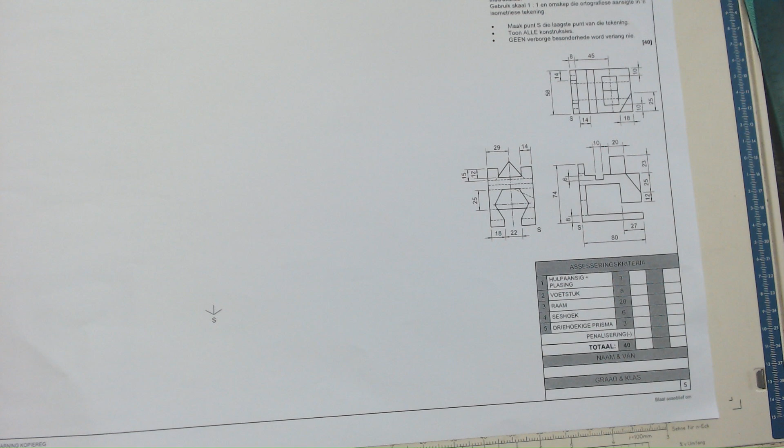Okay, now that we have more or less an idea where I need to go and what I need to do, now I can actually start. First step, I'm just going to move this paper up because it's very low on the board and I do not like that. There we go, that's much better.

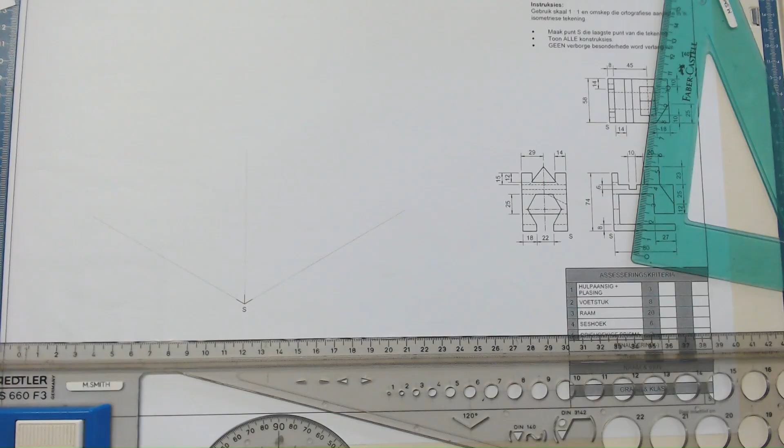Scale 1 to 1. Okay, so top, left, front. All right, so left is going to be on this side, front here.

First things first, I'm going to draw my block, and it's nice to have a method to use in isometrics, right? So you must really understand your process and be comfortable drawing it.

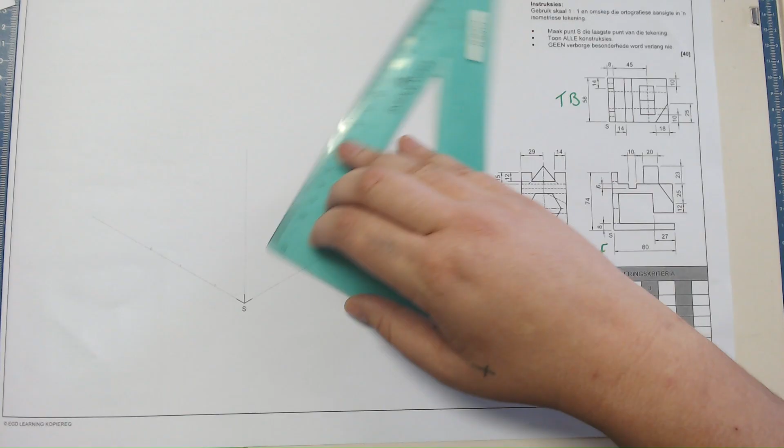All right, if I have my block, then I know I can't go out. If I go out of it, it means one of my measurements is off. It's just a way to double check myself.

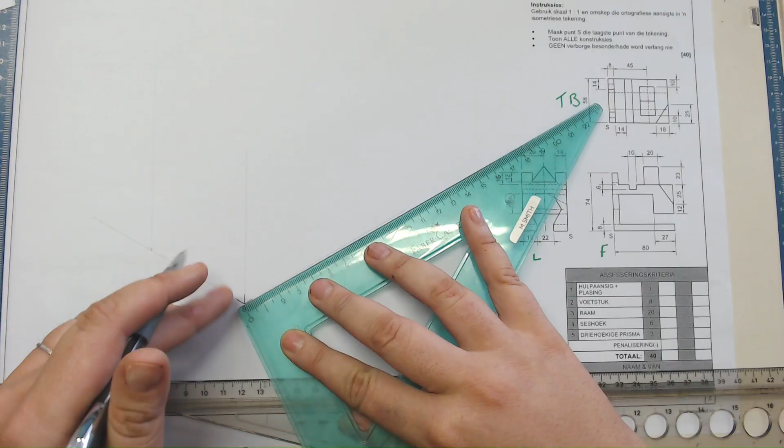Okay, and up, and then how high? 74, 74, but remember that does not include my prism, so I need to make sure that when I do my prism, it won't fit in there, and that's okay, but that's the thing I'm going to do last, because it is a bit complicated. Well, it's not, it takes the most time for me.

Okay, and again, it's my process. If you have a different process, and you want to do the other things first, it's fine, as long as you do it with intent, like you plan and you have a strategy.

Okay, I'm just drawing my block at the back as well, because then I know more or less where I need to go in. Okay, there we go, barely touching. It's okay. All right, so now, because there is a hexagon, I need

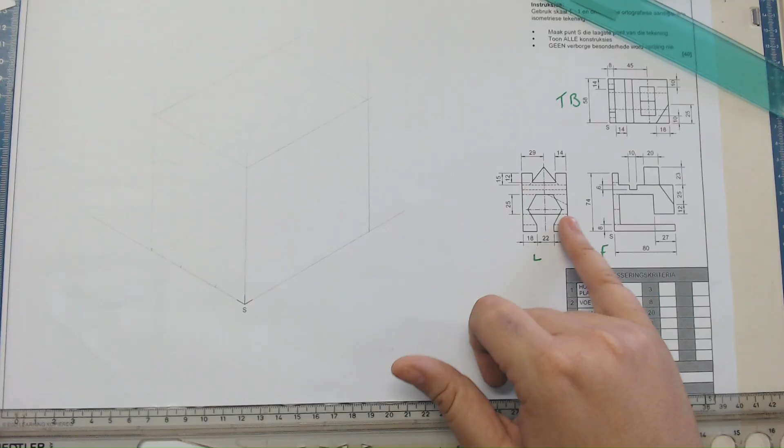to draw an auxiliary view, and if I don't do that, then the whole thing's going to be wonky. Remember, the rule is, if you have lines that are non-isometric, meaning it's skew or slanted, even the prism, you can draw an auxiliary view if you need to.

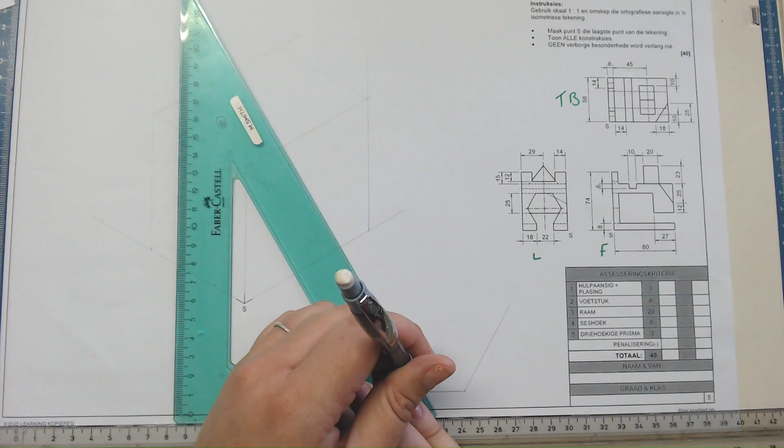So, what I'm going to do is I'm going to draw a hexagon. Remember, use the 60-30 set square. And you just draw. And remember, your auxiliary should be clear, guys. It shouldn't be the lightest construction lines that I have to squint to look at, because I do look at it. It says you must show all construction lines, or constructions.

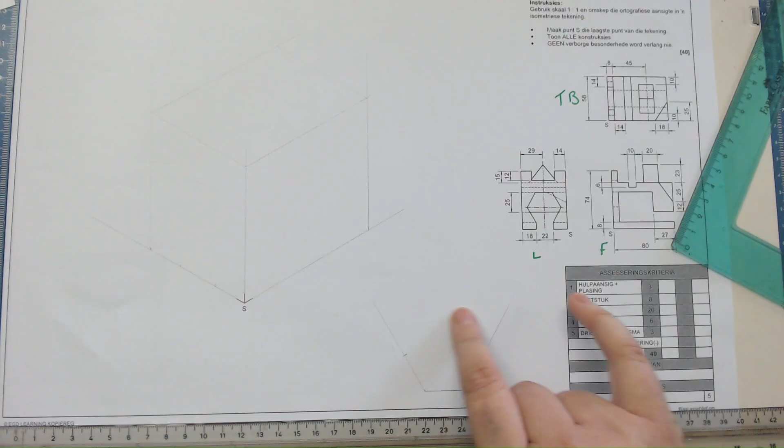All right, now that includes your auxiliary, by the way. Now, if you look at the mark allocation, it was 22, right? Yeah, if you look at the mark allocation, they say that's your auxiliary view and your placing. All right, so you get 3 marks for auxiliary and where it's placed, and where your whole drawing is placed.

Then the bottom part counts 8 marks. Your frame, the whole thing in general, is 20 marks. Your hexagon that you're going to draw, 6 marks, and your prism at the top counts 3 marks. All right, so these are marks you don't want to lose, and they're easy marks to get, so just don't be lazy, don't cut corners, because we look at the corners and we want those corners. All right.

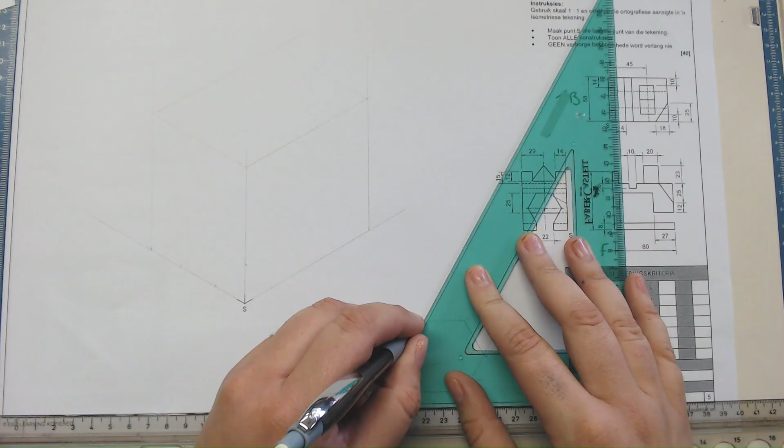Okay, all right, this looks weird. Let me double check everything. That's 22. Yep, 22. Okay, it's just my brain, I guess. Yeah, it's my brain. Okay, I'm just going to draw a block around it.

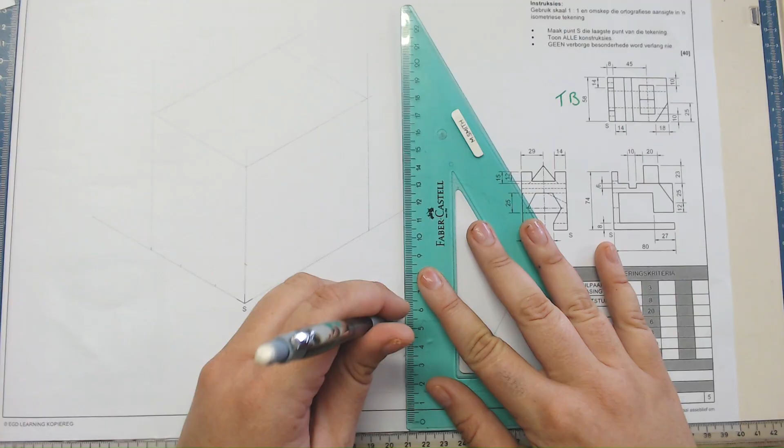Okay, and there, I hope you can see it. All right, but it doesn't need to be... well, it does need to be perfect, but the point is it doesn't need to be exactly perfect.

Okay, so that is more or less over here. Okay, now I'm just going to number my blocks. So that's 1, 2, 3, 4, 5, 6, 7, 8, 9, 10.

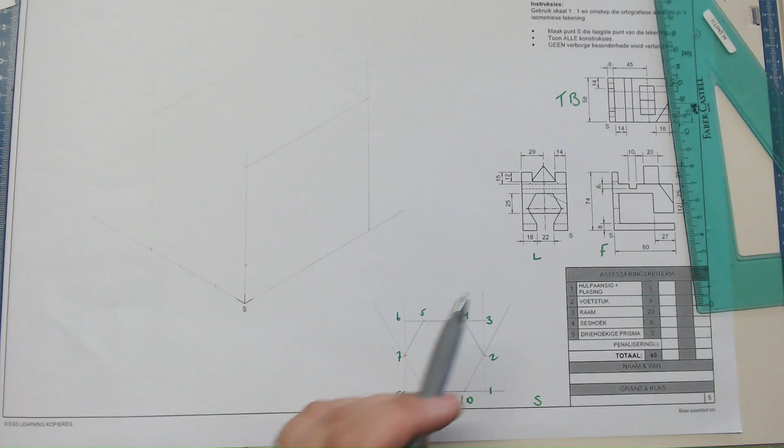Okay, so I'm doing it in pen so you can see it clearly. Now, the thing is, this hexagon is not exactly on the floor, so I can't just start here at the bottom. It needs to go up, so 8 millimeters up. All right, I'm measuring 8 millimeters up.

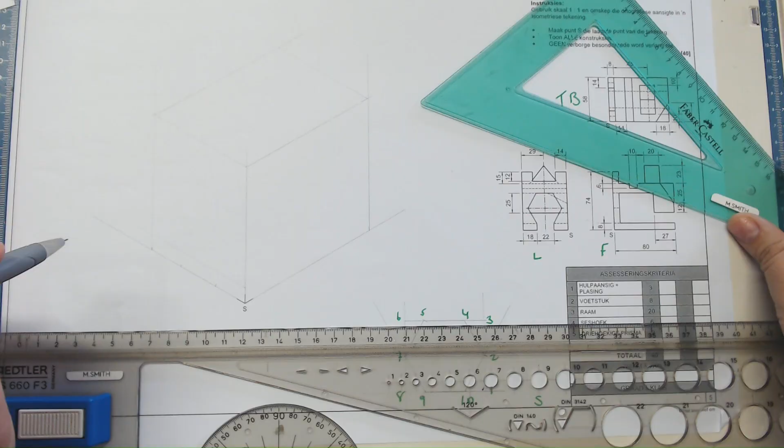Why does this look skew? Is that my brain? It's just my brain, I guess. Yeah, it's all like that today. Anyway, okay, so I'm going to just take this measurement of 22 up, and then I'm going to start there.

There we go. All right, now I'm going to draw my block. Okay, measurements and distances, I have 10 and 9. Ek het 10 en 9, so 10 is daar, 9 is daar. All right, I have 10 and 9.

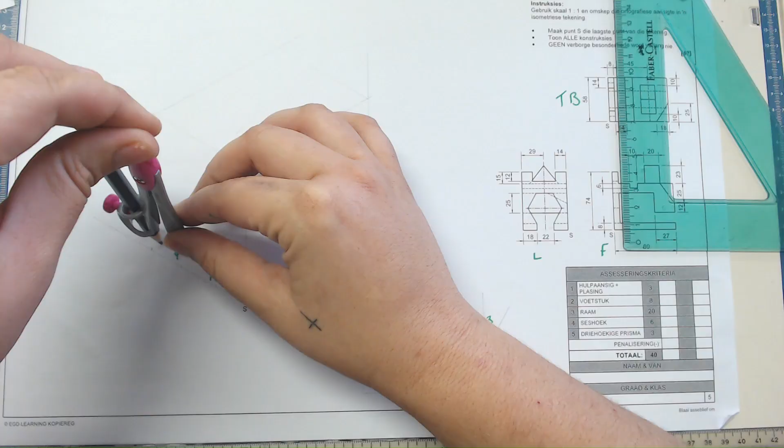So all I want to do is get my distance from 10 to 1. All right, 10 to 1 is there, and 9 to 8 is going to be the same. Okay, so I just make a little mark. Now there's the edges of my block.

Goed, nou onthou jy kan nie skewe lyne meet by jou hulpaansig en dan probeer implementeer hier nie. You can't. You need to have a block with isometric lines in order to draw the non-isometric lines.

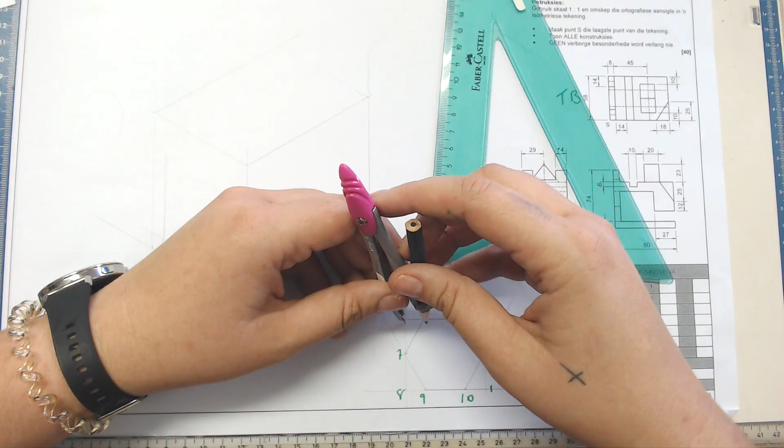Compass, I'm going to just put it between 6 and 8 just to get that measurement a bit bigger. There we go. All right.

Okay, now I know how big it needs to be. And then, I forgot my 7 and 2. Sharp point on the corner of 8, pencil at 7. 8, 7, 10. There we go, there we go.

And all I need to do now is project these marks up. Construction lines, so you can't probably see it on the camera, but it's there to help me. And then I'm just going to finish my block at the top.

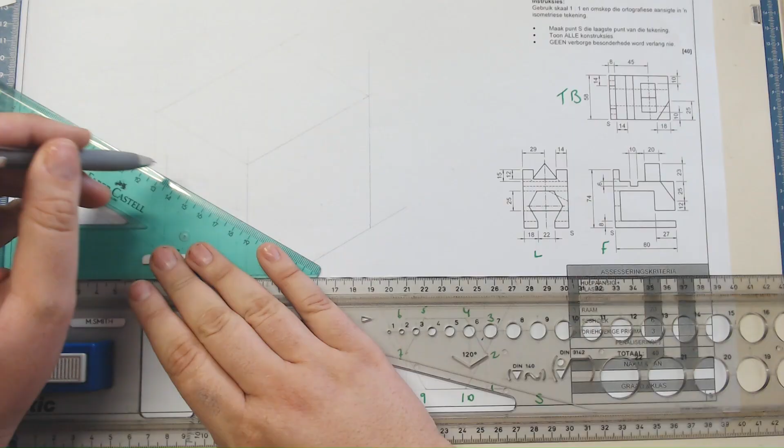Okay, now I know that is going to be the top part of my drawing. En ek connect letterlik net die lyn op mekaar.

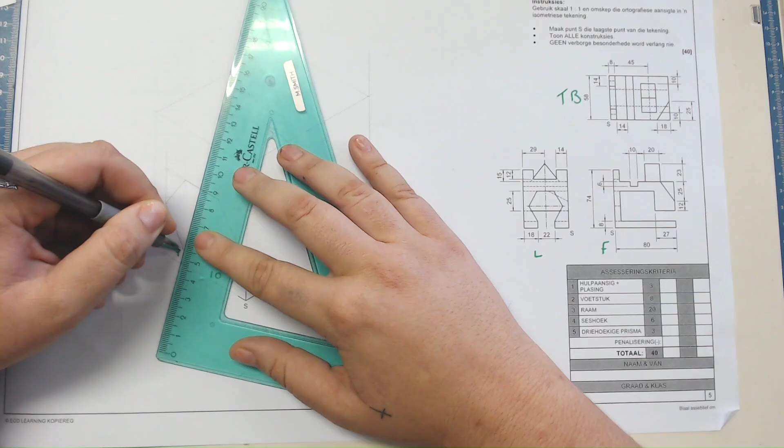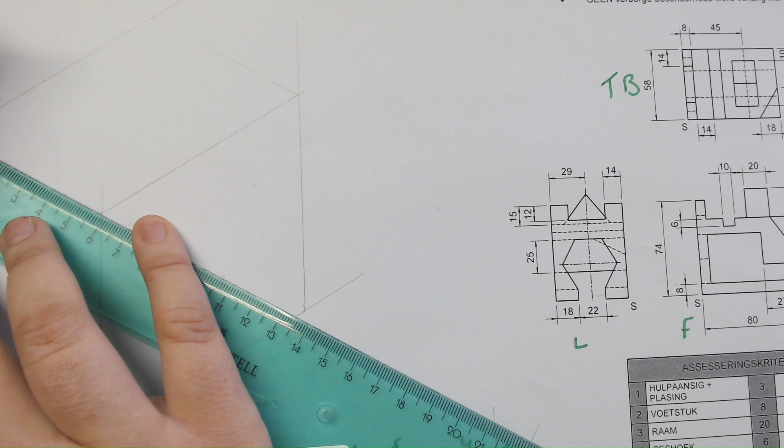It's so difficult to be accurate with a camera in your face. Ek lê onder die kamera en probeer nou maar net van hierdie angle af te draw. Okay, there we go, 14. And the width is 8. How do I know? Because if I project it all the way up, there's 8.

Okay, goed. So dis hoekom jy met al jou afmetings kyk en al 3 jou perspeksies, projections. This is 8.

I'm just going to make this lighter. Make this dark.

Okay, and then I need to go down. How much down? All right, so the inside is 12 down. Okay, so 12 af. Jy moet mooi kyk na watse deel van die tekening wys my aanwysings of my afmetings. Vet lank, daar het 'n bietjie oor gegaan, maar dis okay.

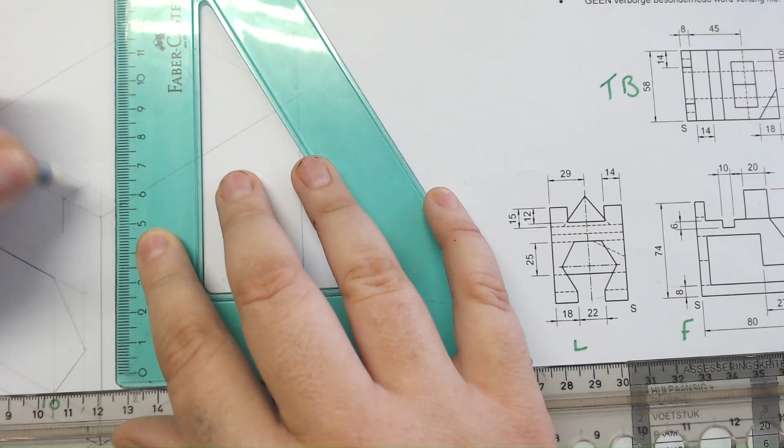Ons werk daarmee. Okay, so that's 12, so I'm just going to project this to the side. All right, there we go.

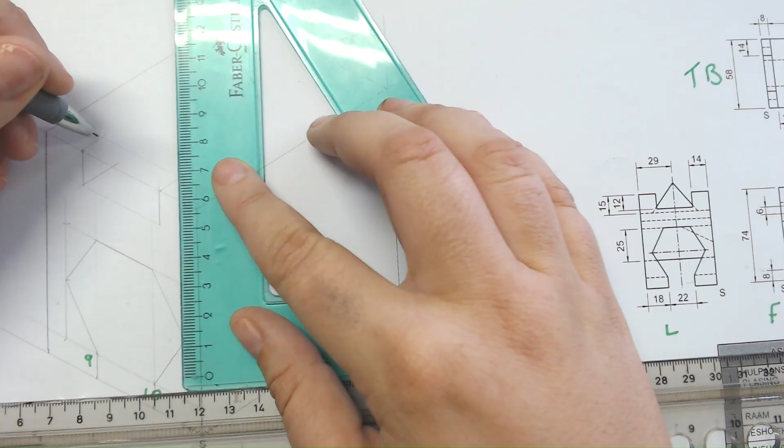Goed, en dan kan ek hierdie, remember, 3-dimensional, you can see corners, so jy moet jou hoek ook insit, nee? Okay, so dit, there we go. Goed, ek gaan hierdie donkerder maak.

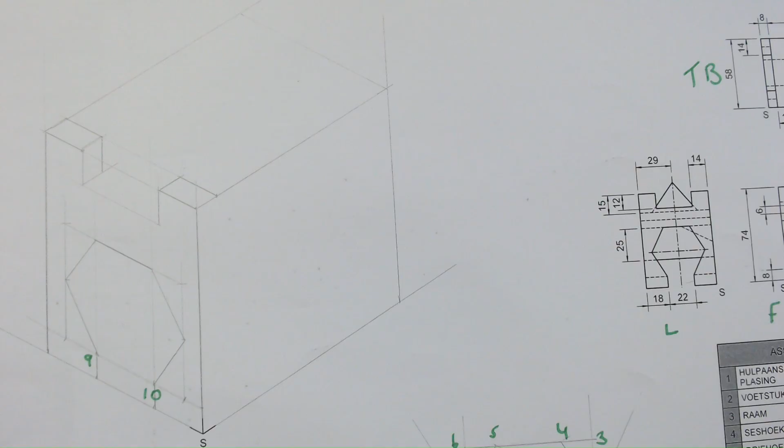Finally I'll work out the marking points. Can you see? Alright guys, so it's starting to get a personality, right? It took quite a bit of time, but you just trust the process, okay?

So now, when I look at my drawing, this continues all the way to there. Then it goes 6 millimeters down, 10, 6, and then whatever. To know the distance of this one, I look at the top view, it says 14, then 8, then 14, then 10, then whatever is there. Okay, so I have my measurements.

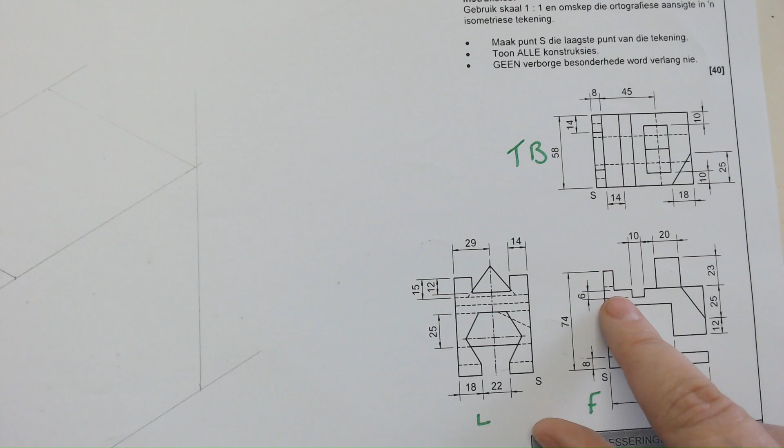All I need to do now is measure them. And then, let me show you something.

If you look at this, that 15 - that 15 is those lines. It's how high it must be from the top. So I'm going to measure 15 down from here. It's going to be a little bit lower than the other side, which it should be. The other side is 12. Alright, 15 down, and then I measure 14 to the side.

One of the things I've noticed is if one of your measurements is off, you guys just continue with your drawing and then everything is going to be off. Oops, I'm sorry, that was off camera.

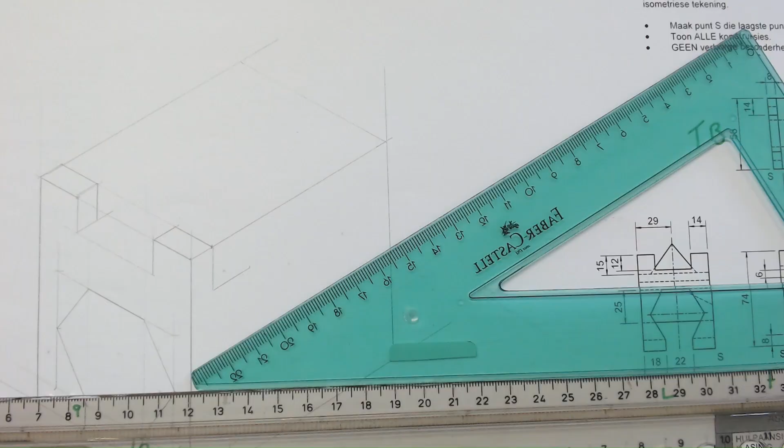So all I did was literally measure 15, and then I measured 14 to the side. I measured 15 down and 14 to the side. But as I was saying, a lot of the times I see you guys have one wrong measurement and then you continue with your measurement all the way around. Don't just do that. Double check your measurements, okay?

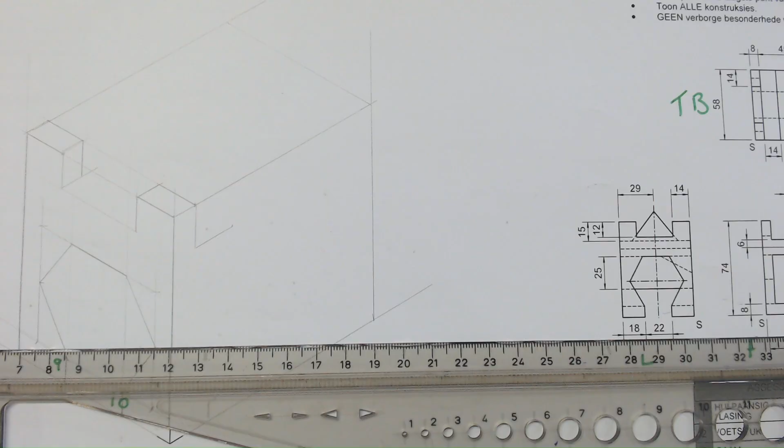For example, if I want to double check everything, I look at this measurement and it's going to be the same as the other side, and then I'll measure things from this side all the way to the inside. Don't just measure from one side to the back. Measure from all the sides. Double check yourself.

So what am I going to do now? I'm actually going to do this back part. It's quite easy - the back part, the bottom part. Ooh, that is so skew and very ugly. I'm very sorry about that. I'll fix it quickly.

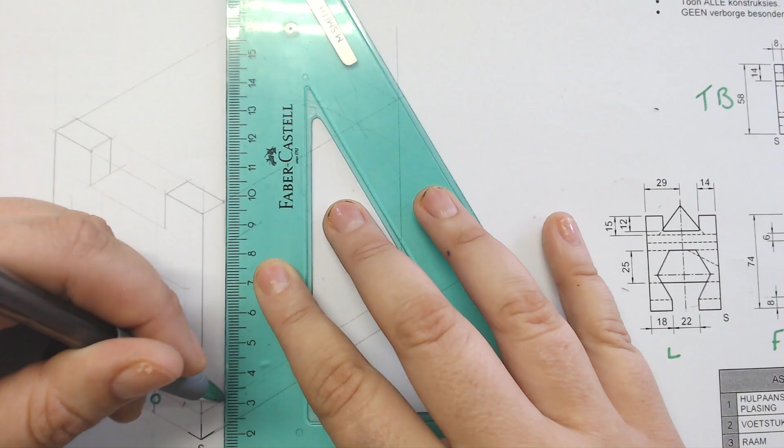Alright, that's better. And then it goes the same measurements here. And it is 8 as well. So I'm just going to make a little line there because that is basically where everything goes. I'm going to erase this corner just lightly, because I need to remember not to continue drawing that line.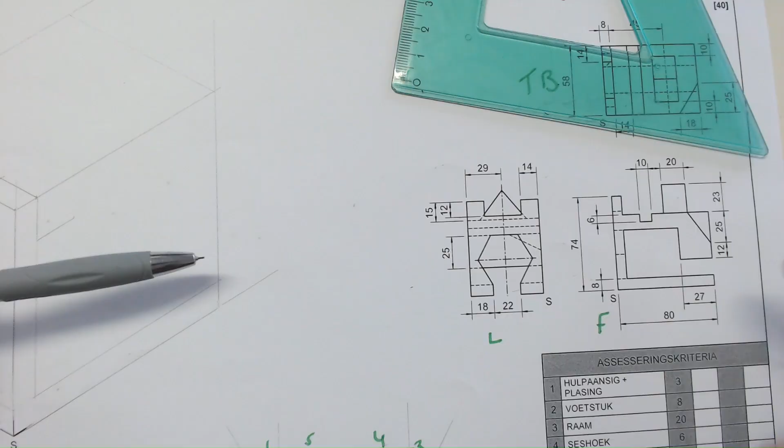So I've drawn this side part now, this side part. So next step, I'm going to get this gap. Now, again, if I use my ruler and check where my projection is, you see this hidden detail line? It's basically that back line. So now I know that this is - and as I look here, the top part of my hexagon is basically the height of the other part.

So all I'm going to do is first project this one to the side. I'm going to take this measurement to the side, and that same height I'm going to take all the way back, because that is the height - that is this part as well. So I've taken that height, projected it and taken it.

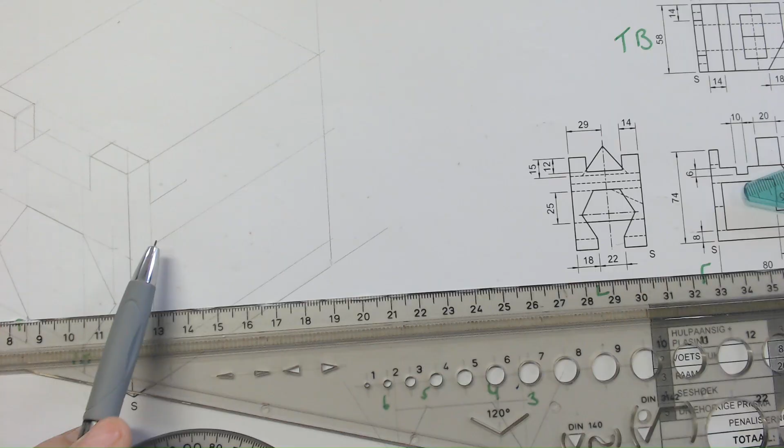Alright, I'm just going to zoom out, because I keep cutting you guys out of my drawing. Okay, so next thing I'm going to do, after I have that height, now I'm going to measure 27mm from this side, just to get that bottom part.

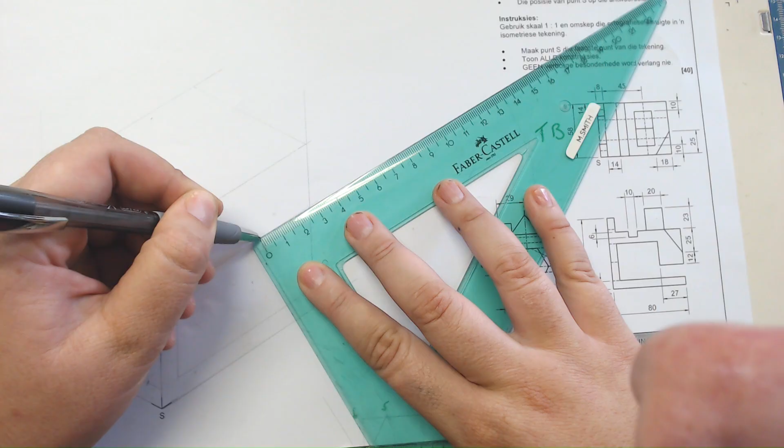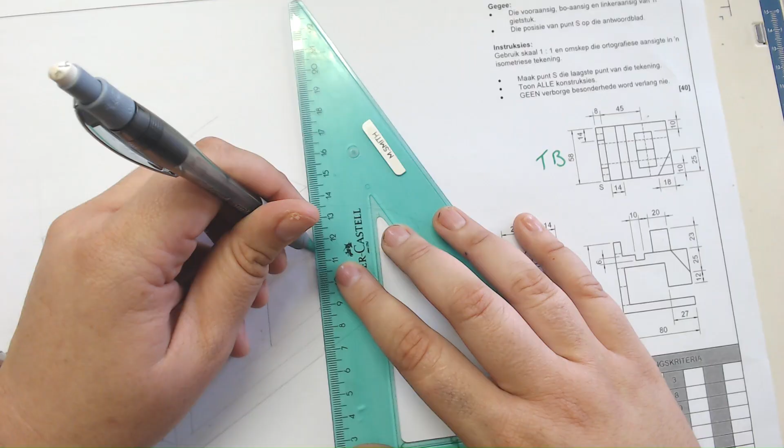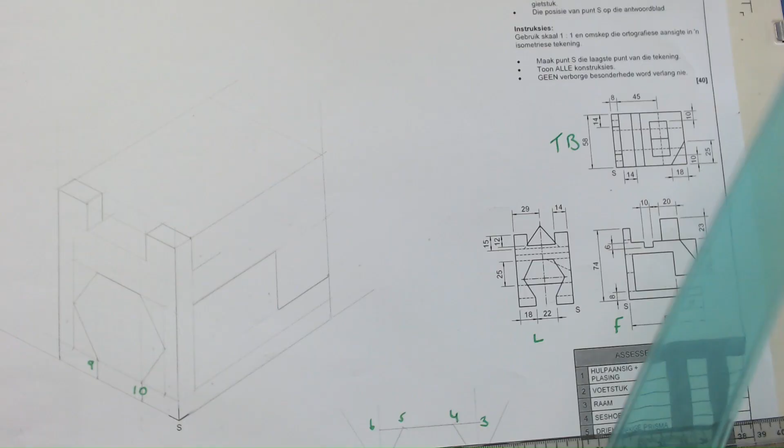Okay, so next - that height is 12 millimeters. So it's 12 millimeters up. So I take it from there.

12, that's right, good. And then that corner is 18 millimeters in. Okay, wait, before I do this - I'm going to take this line through because even though I'm not going to use it, it's kind of necessary to know where the placing is.

Okay, so now I'm going to measure 12 up, right, and then 18 from here. So 18, 18, and 12 up.

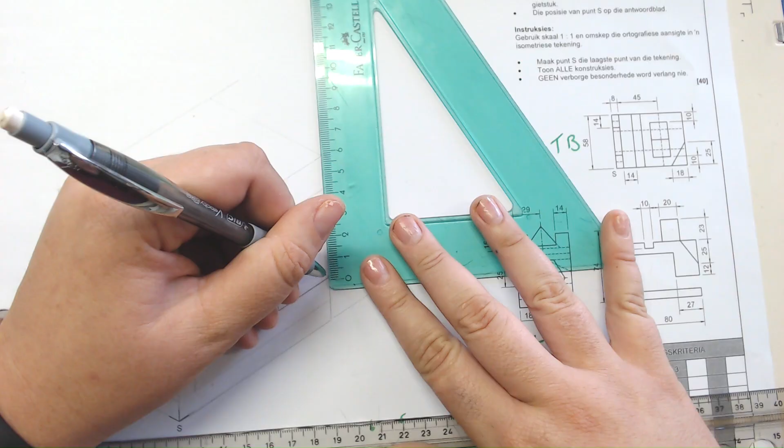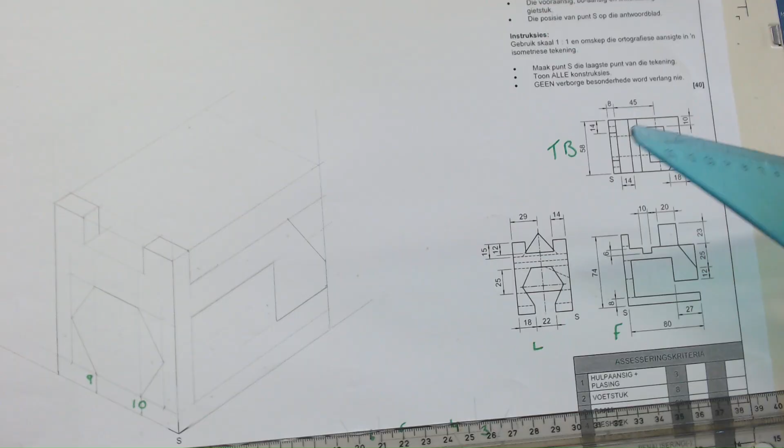Guys, you really can't just look at videos and think, okay, now I've figured it out. You need to practice it, you need to get your head around it and understand how you need to think, otherwise it's not going to work. The more you do it, the fewer mistakes you'll make and the faster you'll be able to draw it.

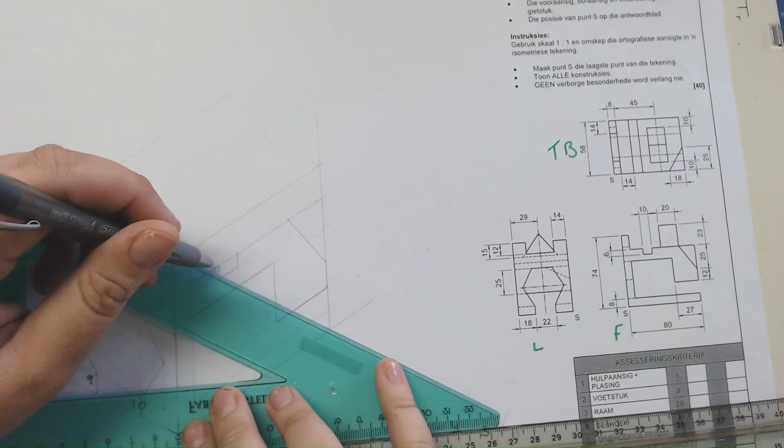I'm just taking this to the side because some of these corners will be seen, so I'm just drawing the lines lightly. Okay, next, I'm going to finish this corner quickly.

It's 25 from this corner. First thing I'm going to do is act as if it's not cut off, so I have that angle, and then I can measure 25. So I'm going to make a little mark, and then I'm just going to cut it.

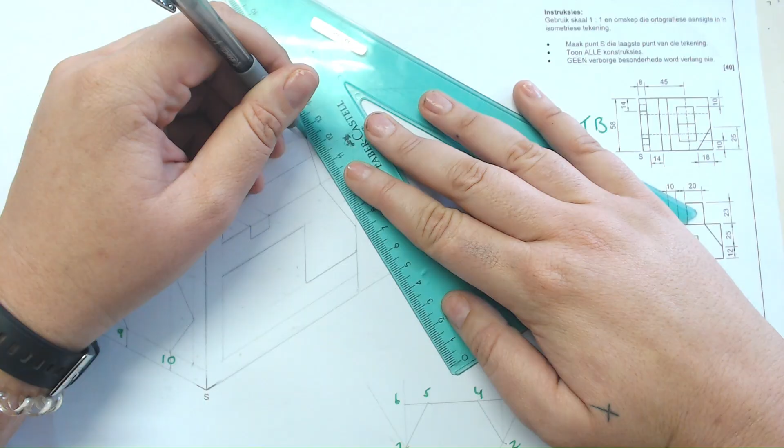The thing is, you can still see a little bit of that corner that's been cut, so that's why I'm making it a little bit of a wonky triangle. Just to explain, this corner is basically that area you see there. It's not empty, it has a bit of an angle and you can still see it.

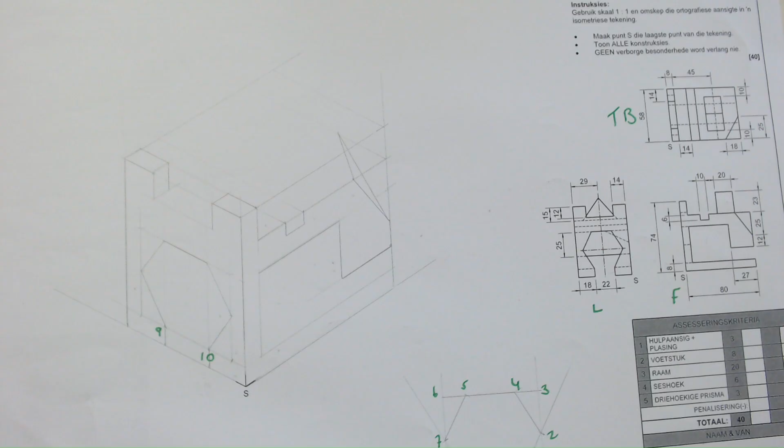Now I'm going to darken this line for myself. There we go, and then it's very skew. Guys, I'm making a mess, but in my defense, it's really difficult to draw with a camera on my face.

Now that I have the majority of these things, I'm going to take this measurement, make a little mark there, and then project it to the side. It's a lot of work, but you'll see why, taking this to the side here.

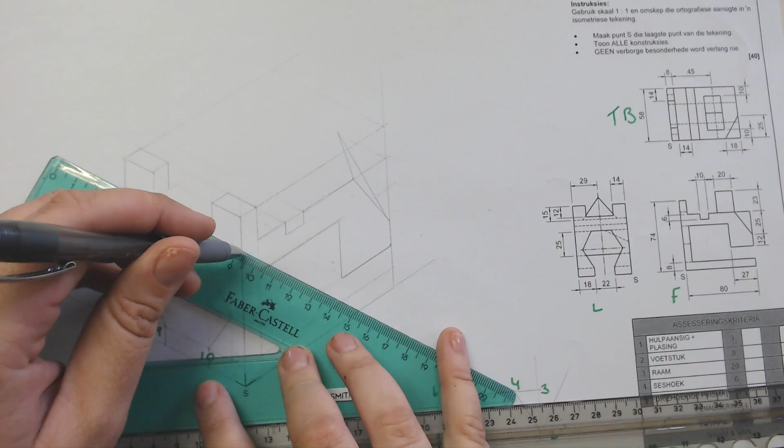Now that I have that, I'm going to make a little line there. I did all of this just so I knew how high and where I need to stop with this line. Then I'm going to project the corners here and take it to the side, and extend it, just this.

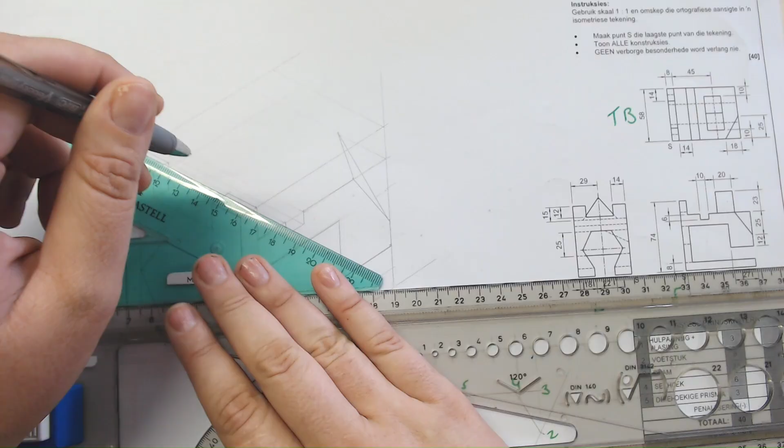Okay, and it goes down, then you can't see it. And then this one goes down as well, like that. And then it goes to the side.

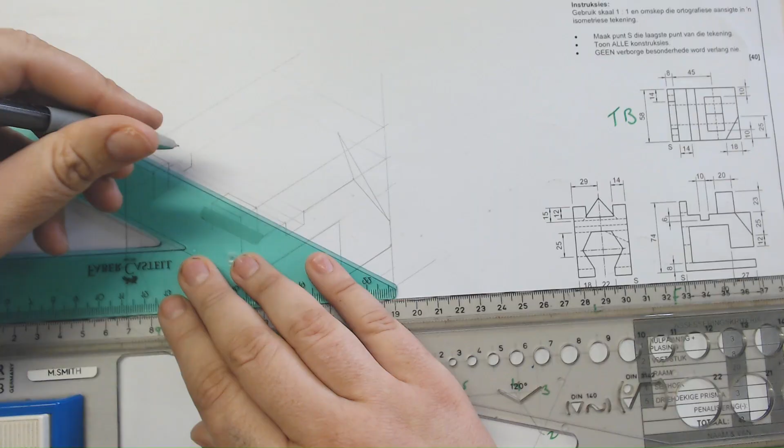Let's just fix this. I did something stupid now. I don't need to draw that. All I need to do is extend this. Oh, I'm making a mess.

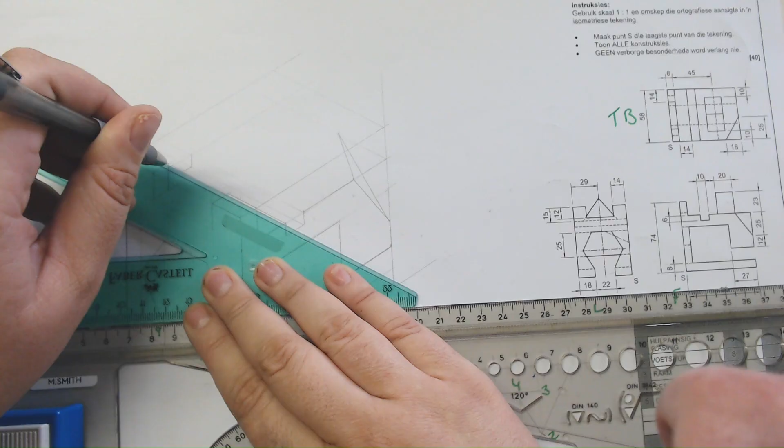Okay, so what I'm going to do is this corner, I can now make darker. See, this is why you need to concentrate, because if you don't, you have problems.

That's the ugliest looking line I've ever drawn, but it's fine. Okay, now we are almost done, guys, very, very almost. This line here that I have is basically what I'm going to build my prism on.

Now the prism is 20 millimeters wide, and it starts in line with this one. So what I'm going to do is make a little line in this corner, because now I know more or less where my prism is going to be, on that line.

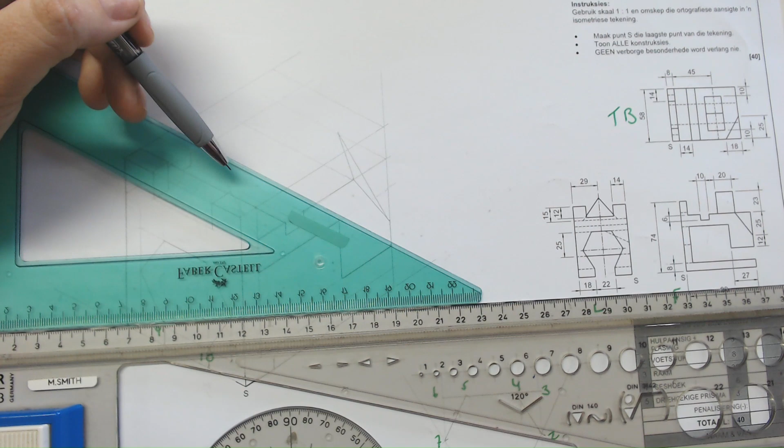Then it's going to be centered in the middle of my drawing. Okay, so it's going to be 58, minus 10 on the left and minus 10 on the right, so it's 38. I'm going to measure 10 millimeters, 10 millimeters, then I know how deep it needs to go.

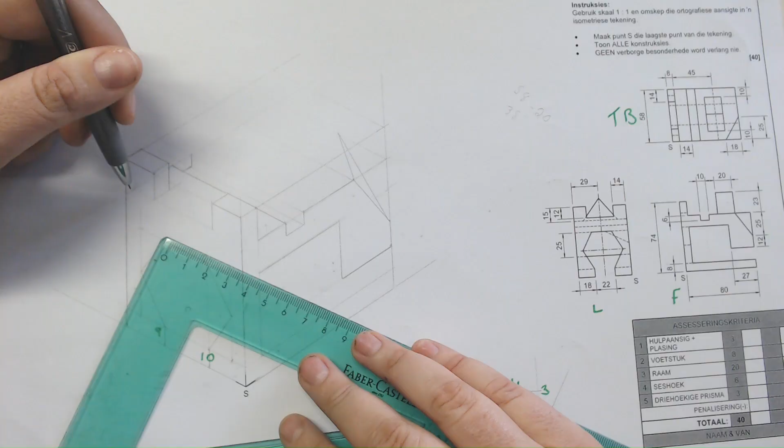Let's just turn this around, otherwise I'm going to break my brain. Okay, this one is there, yes. So 10 and 10, that's where it needs to be.

And how wide is it? 20 millimeters. So using this angle, I'm just going to measure 20. There, alright, once I have that, I can move on to the next part, which is actually, we're almost drawing it.

Let's quickly just get the outline. Alright, and basically here, that's my block that I'm going to work inside of. Did I measure wrong now? No.

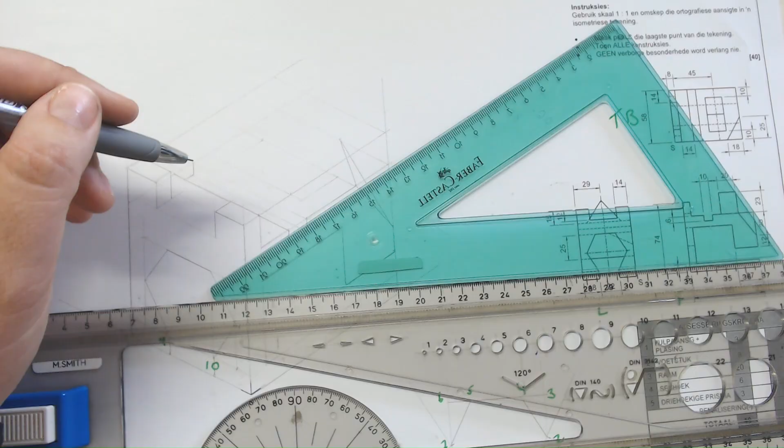Okay, my prism is going to be in the middle of this. I want to double check quickly, so the center line should be 29. Okay, there's my center, I'm projecting it to the back.

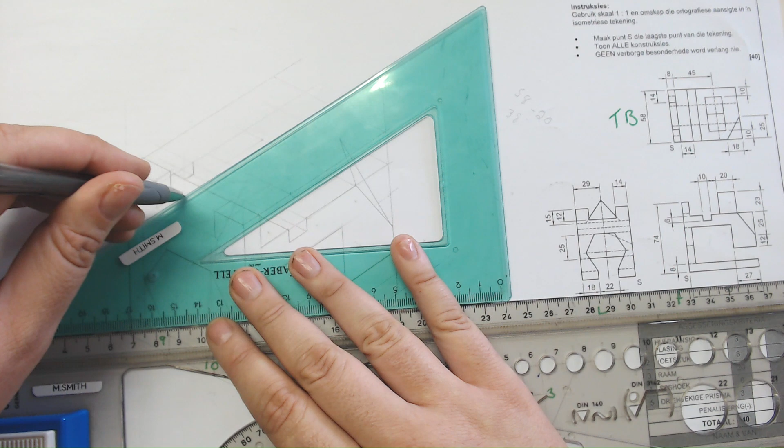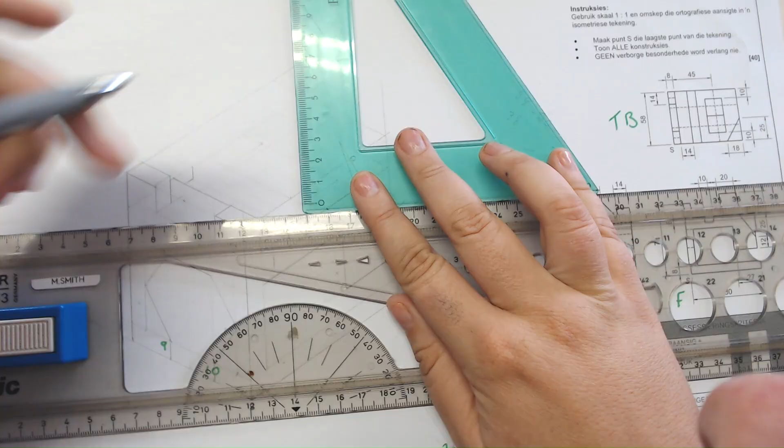Okay, so basically this is my center line, and now I just need to actually draw this prism. So, 23 up. And it's the wrong one again. Yeah guys, my brain doesn't want to work. Oh, it's the right one. Yay, okay, I'm just going to make a little block.

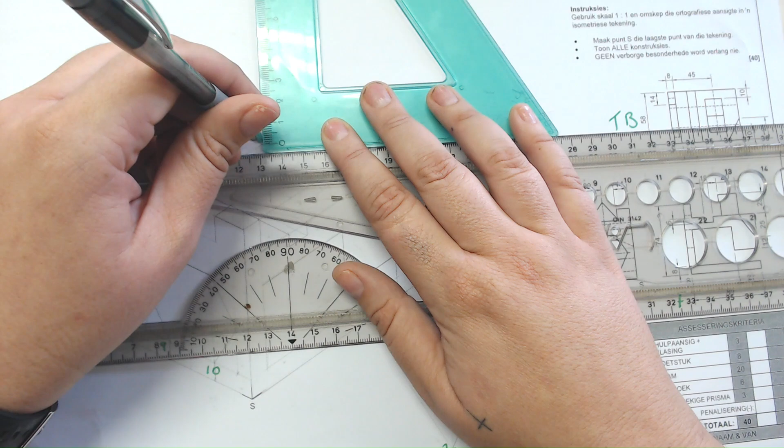Now, the thing is, it doesn't help if you draw a bunch of lines and blocks and stuff, but you can't remember what you did. So you'll see there's a lot of lines here, but I know more or less which one is which. Sometimes I make mistakes, a couple of mistakes, and it's only because I get confused with all my lines. So yes, you should not erase them, but also just be careful not to have too many.

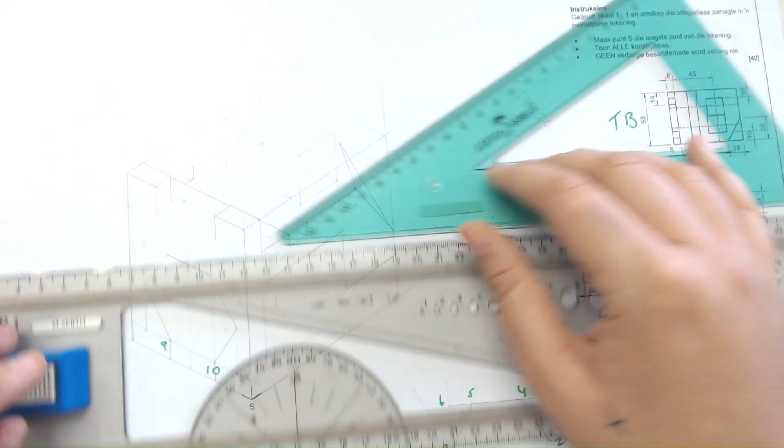Okay, so this is basically the block that I'm drawing, and here, and this one, and this one. And there's my center line. So here to there is where my prism is going to go.

And yes, it looks funky.

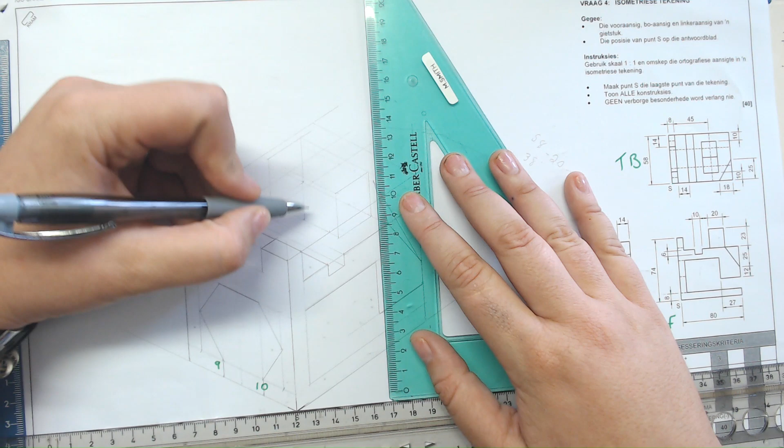Now I'm just connecting the dots. Okay, so I'm darkening it.

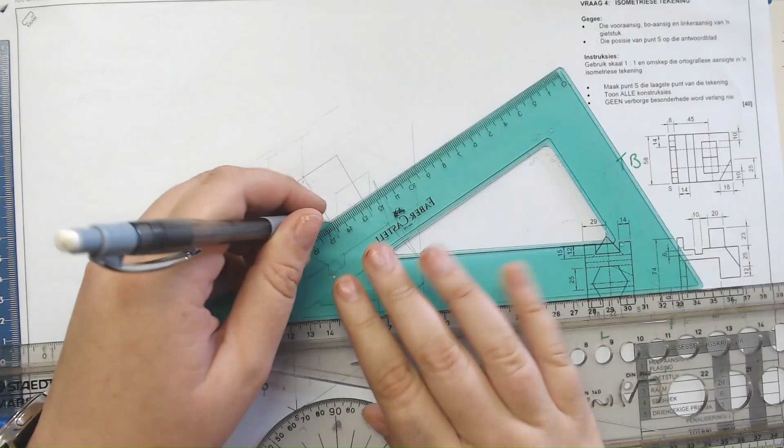I'm just darkening all my lines that I left unfinished. So I'm literally just going to follow the lines now.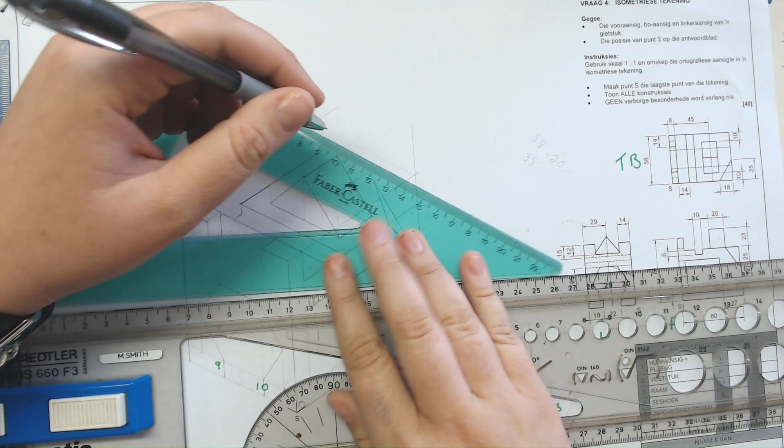There we go, just a bit of erasing. Okay, alright guys, almost done. Just darkening my final lines.

Okay, then, almost forgot this. This is actually a stupid way to lose marks. Okay, then I'm going to take my prism. This is going to catch us out.

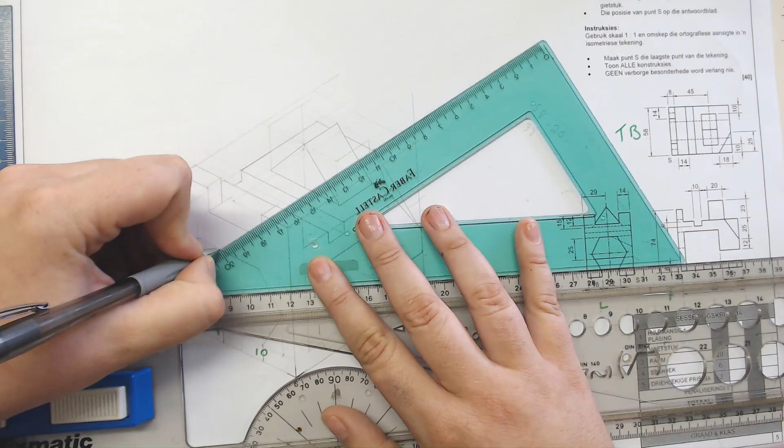Okay, so the prism is actually only that distance, right? So it's 8 millimeters. At the back here, all I'm doing is measuring 8 millimeters on every corner. 8. 8 from that corner as well. There we go. And then 8 on this corner. And 8.

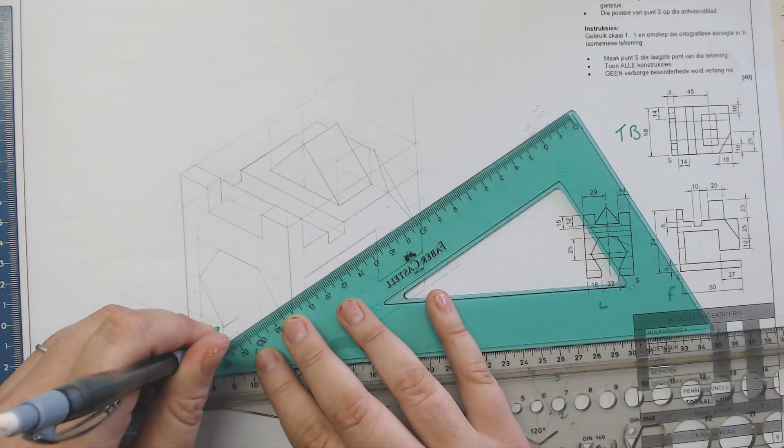I'm taking it all back. Okay, and I'm taking it up because behind it is hollow. So from this one, I'm going to take it and just end it there.

Okay, and the same is here, but I can't see it, so it's hidden, and I don't need to add hidden details. So now, here it comes.

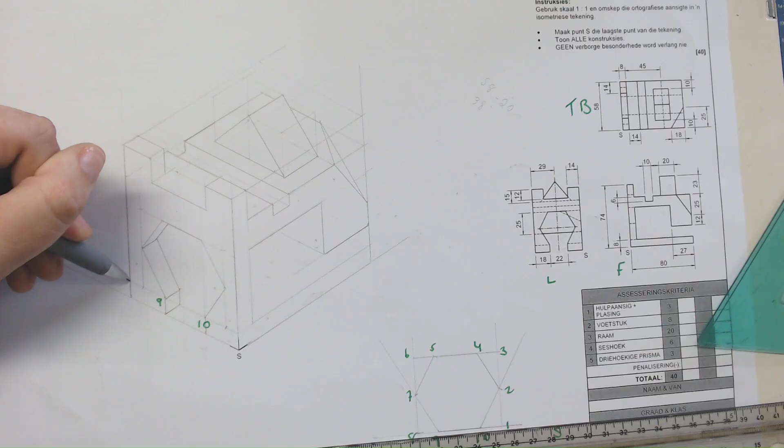I'm going to take this line, this corner, project it back.

If my pencil wants to work. Like that. Okay, and this to the back and this to the back.

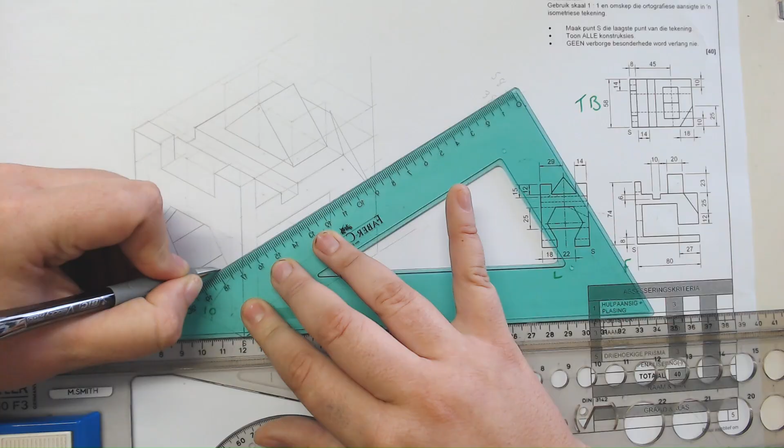Alright? Because this part is basically the flat part that's still remaining, so this one also needs to go to the back. Just that, as I put down, take this one.

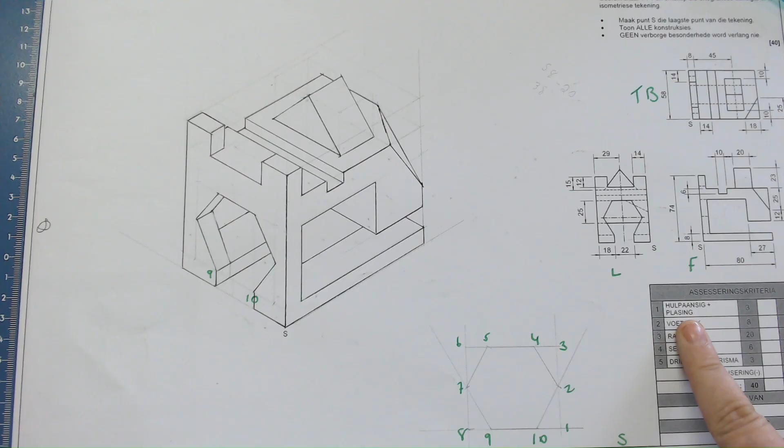So you get a mark for where you start, and you get 2 marks for your auxiliary view. That is a total of 3 full marks. And with EGD, you don't often get full marks like this, so you need to make sure that you add that.

Then the foot placement and the voetstuk. It's a combination of half marks and full marks. You get a half mark here and here for this part and this part. So that's 2 marks in total.

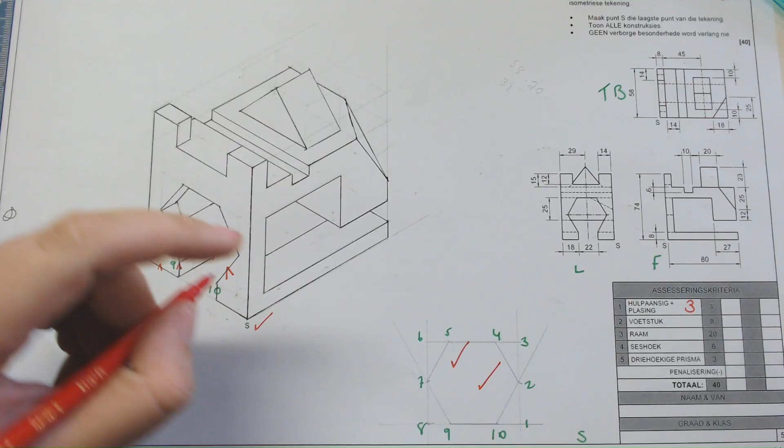You get a half mark for this part. Okay, and no, you don't. I'm sorry, that's my mistake. That is for the other side.

So it's half mark, half mark, half mark, half mark, full mark for that line, half mark, half mark. So it's 1, 2, 3, 4, 5. Okay, it is 5.

And then you get a half mark. Ooh, I forgot a line, guys. Oh my hattles. Okay, so basically remember this line, it carries on to the back. So I forgot to add a line there. I would lose a mark there. Alright, a full mark, that's the worst part.

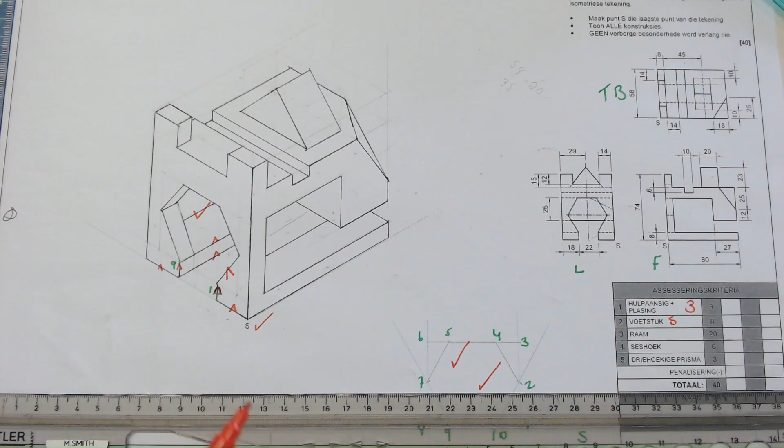The rule is I mark with a mistake. So if one of your lines is a little bit off, then I would adjust. You'll lose a mark, but then also I'll adjust the others so you don't constantly lose marks.

Okay, so technically you'd also get 3 marks, but I would get like 2 marks with that. So that's 7 marks. That's sad. Okay, anyways, a stupid mistake. But you see, if you are not careful, it's easy to make mistakes.

Now let's look at the frame. I'm going to use a different color for this. Alright, let's use dark green.

Okay, so for the frame itself, half marks count the most marks. Half mark, half mark, half. You see, there's a lot of marks here.

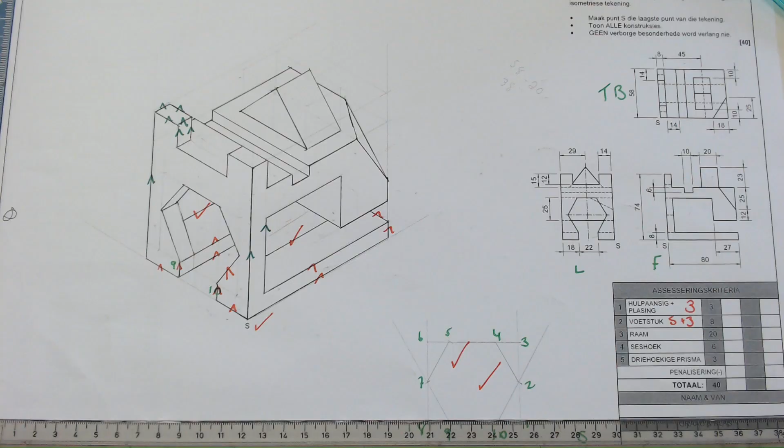Oh my hattles, I made another mistake. It doesn't really make sense why, but anyway, there is supposed to be a line there, and you see that's a mistake because the solid line tells me there should have been a line there. So I am losing another half mark. Okay, but I get half marks for the others still.

Okay, so that's why it's important to be very careful with your lines, because in the end it adds up. But if you just do the rest correctly, meaning your measurements and things are still fine, then it's literally just half a mark in isolation.

But if everything else starts to get messed up, like let's say, for example, this line is wrong, then my whole corner here would be completely off, and that's a lot of marks that you'd lose. So I'm just showing you guys with these arrows that go up. That is basically my symbol for half marks.

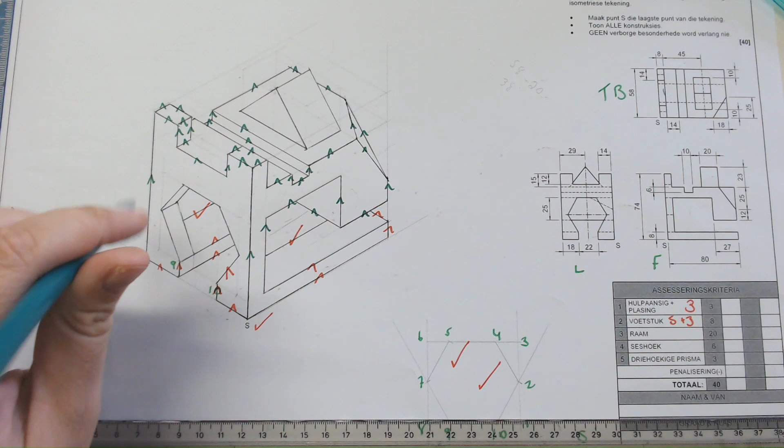Alright, and I think I got everything. Oh, there's one there still. Alright, yeah, I think that's everything. In total, it would be 40 half marks and 20 full marks, basically. But because I missed that line, it would be 19 and a half. Alright, so that's very sad.

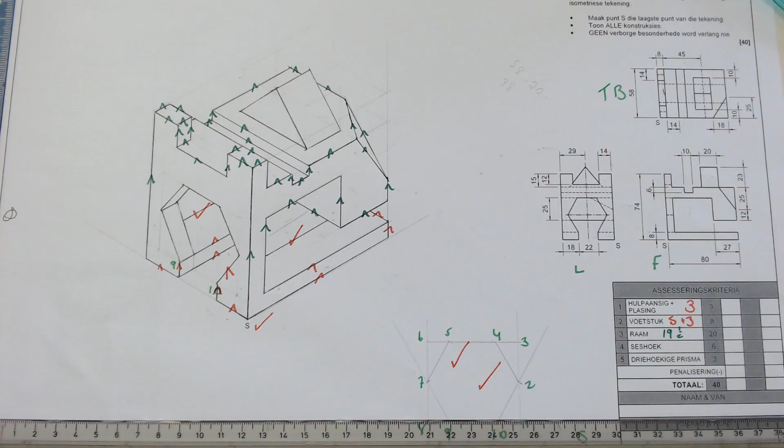Let's move on. I'm going to do the hexagon now. So, goed, nou hierso kan jy volpunte en halfpunte kry.

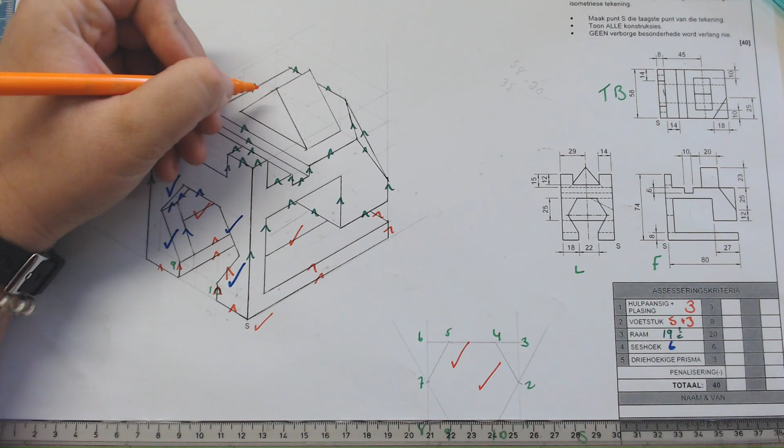Then the prism, this one. So few of you guys actually did the prism. It's very sad. Okay, you should just approach it logically. Half mark for this one, half, half, half, half, half. And there we go. There's your 3 marks.